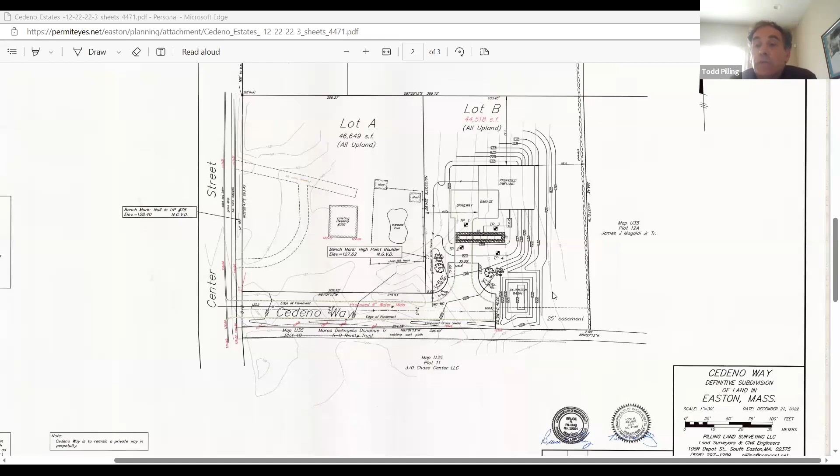I'd rather leave it at the hammerhead. It's a lot less asphalt, much simpler for one house. If this was more than one house, it would be a different discussion, but this is effectively a driveway to this house. Right, and in looking at it and doing some measurements, it was clear that a fire truck could pull in and back out of that.

So again, I think the board should discuss the question of the easement. I'm sorry, the frontage on the property.

Todd mentioned that they do have an environmental impact report that they will provide. He talked about the stormwater, which was my conclusion - it's very clear that's how they're directing stormwater from the site to that basin and through the swale. So those are my only comments.

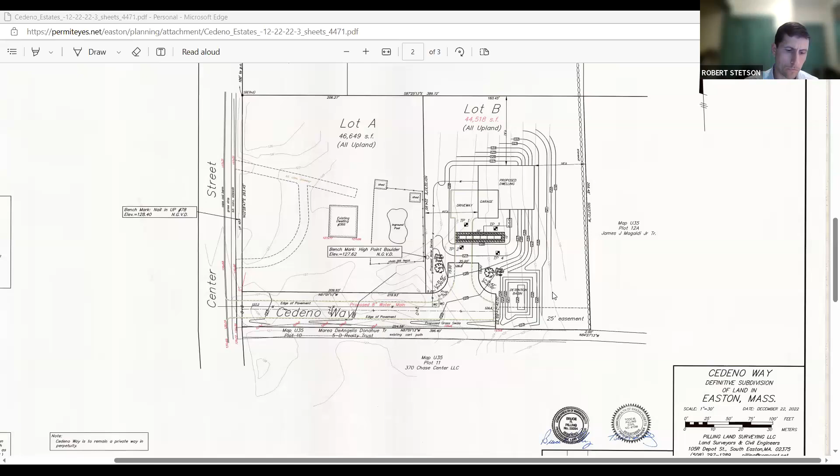What is the actual street address of the existing home? 366 Center. Okay, thank you.

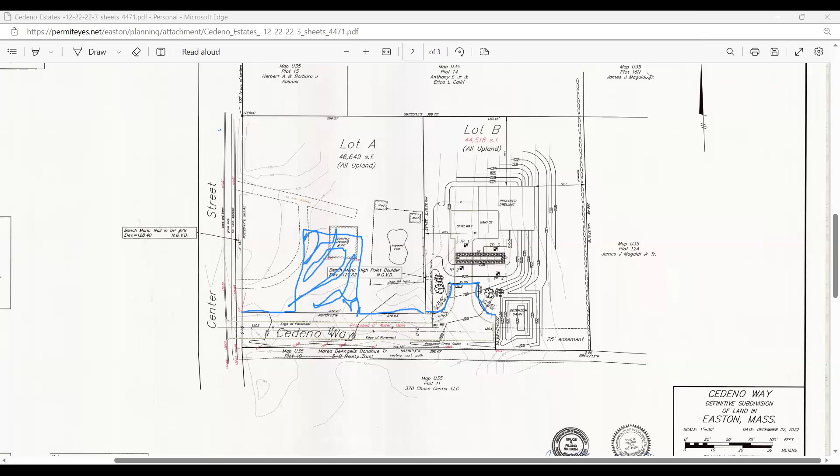What would be the drawback to just having a cul-de-sac? Mr. Pilling, I have a question: if you are going to do something else, what happens with the infiltration basin you have there? Well, like I say, what I would probably do is make a circle, because the 30-foot radius is only 60 feet, so it's actually smaller than what you see here. It would fit right here, smaller than what you're seeing. I would leave the pavement and the drainage basin right where they are, so none of that would change. You would just have a different circle property line.

Is the hammerhead your preference? Well, it's my preference because I don't see the need for this otherwise. This is cleaner for the fire department and vehicles turning around, they're turning around in the way as opposed to on private property. I understand it's a private way, but I'd rather keep street traffic to the street and driveway traffic to the driveway.

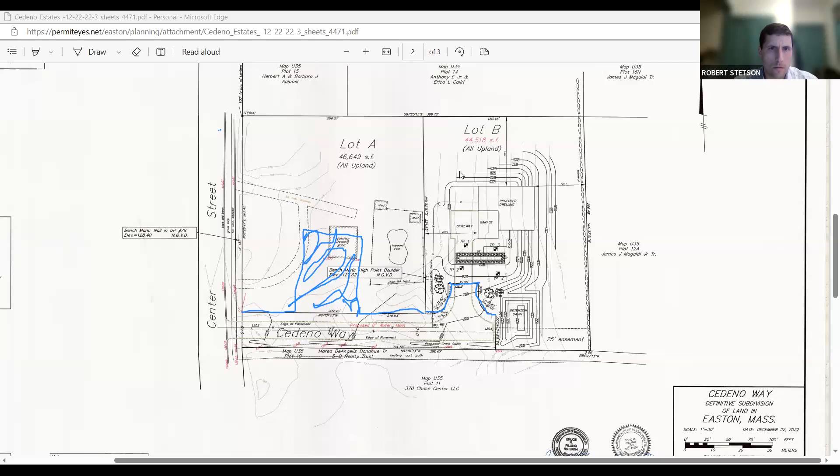Do we have that in writing from the fire department? I don't think they weighed in on this yet. Okay, well, maybe that's something we need to do. I'd be interested to hear what the fire department has to say about this as well. I'm just checking because you had no adverse comments, and I think the fire department did weigh in and approve it, probably based on the hammerhead. Let me just look this up.

While she's looking, I'll answer the question in the chat. Somebody asked if that existing home at number 366 is going to be demolished and a new home built, or if we're just going to leave the house. The answer is that we're going to keep that house, the pool, and the driveway. It's all staying. This is just a property line to create the second lot.

Did I buy you enough time? Yes, the fire department did not comment.

So next time, Stephanie, I'd like us to hear their comments before. I can reach out.

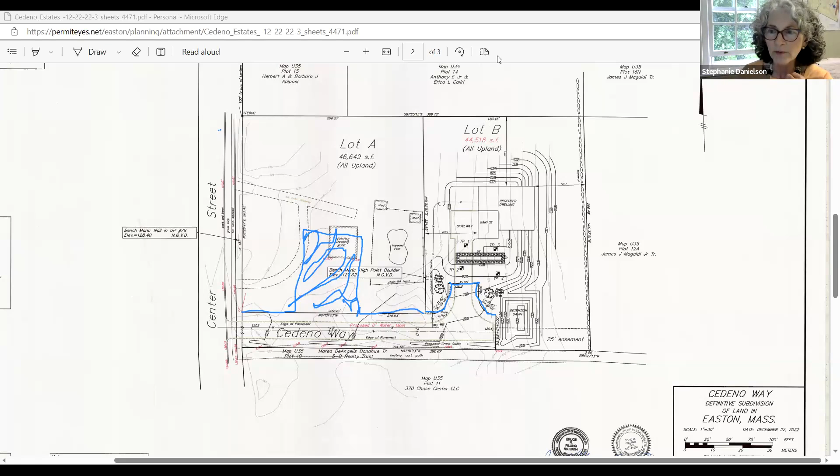I was just gonna say, I recall, and I'm trying to remember if it was Deborah Lee Lane, which project it was, where they did a similar thing. The road layout had the cul-de-sac, but rather than extending the road from the existing cul-de-sac, they were building two adjacent lots that were undeveloped. They wanted to extend the road but needed frontage, so they retained the layout of the cul-de-sac and just extended the road, so you didn't have to, as Todd pointed out, just throw a bunch of asphalt down to satisfy the frontage requirement.

And Todd, where the road is going to, or where the access for lot B is going to be, there would be some tree clearing adjacent to the existing house that's remaining. Is that right? Yes.

That full width of the roadway would get cleared, so we can put the grass swale on the south side, the underground utilities on the north side, plus the 20 feet of asphalt.

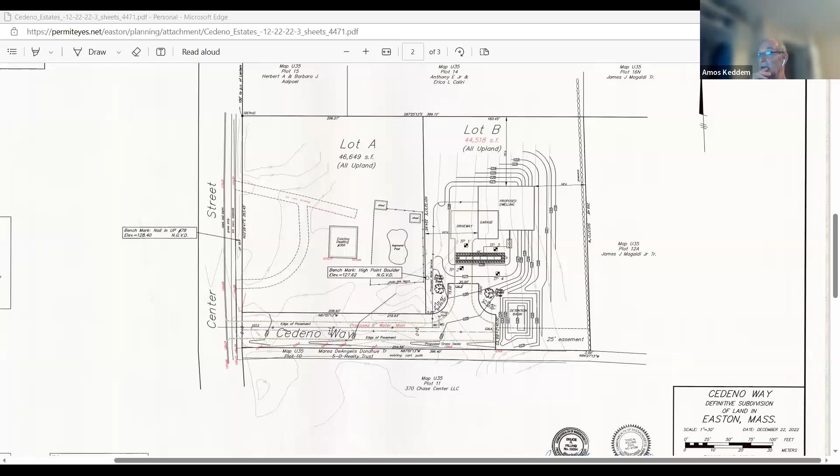Mr. Pilling, I look at the picture from the street view, and I see power lines going there. Is a facility of power going to that entrance today? Let's see. Yeah, right there, hold on, I think it shows up from the street better. It shows the power line there. So the underground utilities are going to come into probably some kind of transformer because it's over 300 feet to the house, and then the electricity will come in off of that.

Stephanie, looking at these waivers, what is the reference to 501-26, the waiver for the 42-foot bounds? So the bounds are, that is the depth, right? 42 inches, yes. Excuse me, I'm sorry, I said feet. Yeah, I'm not setting a 42-foot bound.

The board has heard this before, and I can't remember what project it was, but what the board had been told is that the requirement of the town is a 42-inch bound, so a 42-inch in depth bound. These are the stone markers, concrete, that mark the boundaries of the property. Yes, and what we've been told is that the local manufacturer's standard is 36 inches, and that it's quite a bit more for the 42 inches.

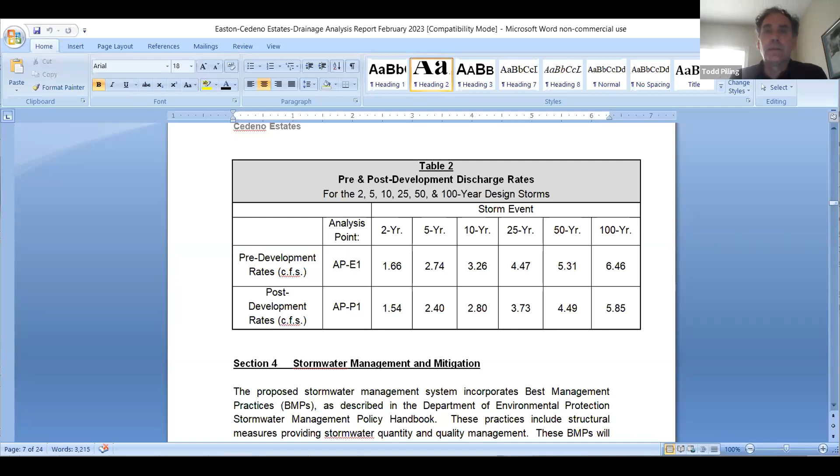But we're doing our best to reduce things out there. Obviously, we're going to add in the tree line to try and make it better. I'm not sure if I'm explaining it well enough for you to understand. Obviously we can spend a lot more time on drainage, but I'm not trying to bore anybody either.

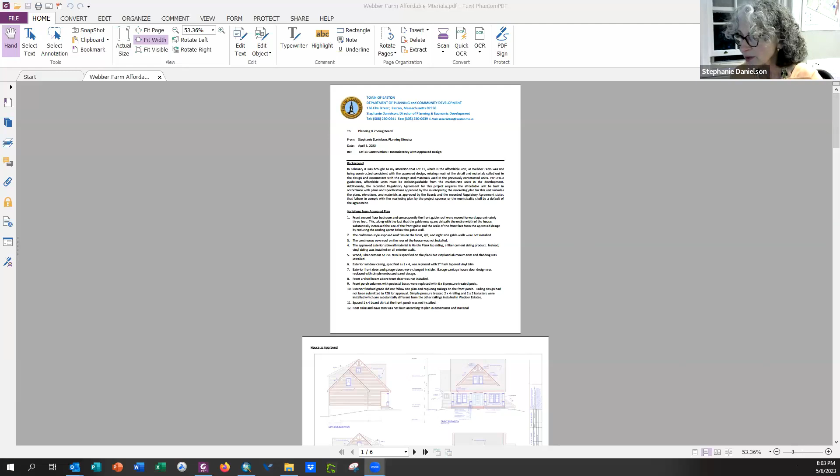One of the things the board can do is issue fines as part of the violation. You could indicate that if they don't come into compliance and meet the goals or changes that the board wants to see, or the correction the board wants to see, you can start issuing fines, and it can be retroactive to when the first violation occurred. So you have the ability to assess a $300 fine for a violation, and every day the violation remains in effect, it's an additional $300. I think frequently that's used as a tool to get to the correction — really what you want to see is a correction.

So in the documents that I shared with you... when you say what the board wants to see, isn't that clear? We want to see what was on the plan that was approved. What else do we need to do? Do it according to the plan we approved, or else, whatever that is.

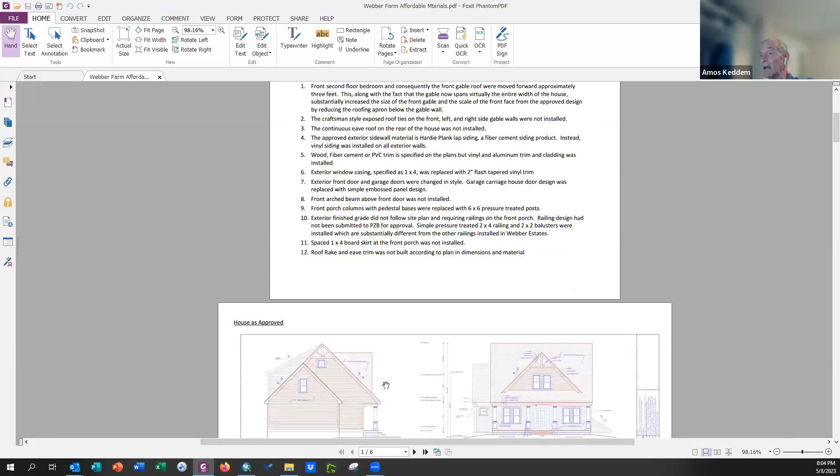What do I need to do? We need to go make lists again and work very hard. They are in violation, they didn't comply. There is a plan, it's very detailed — you even detail one by one all the things that don't match. What else can you do? That's it, we need to hear from them. But I don't know what enforcement tool we have.

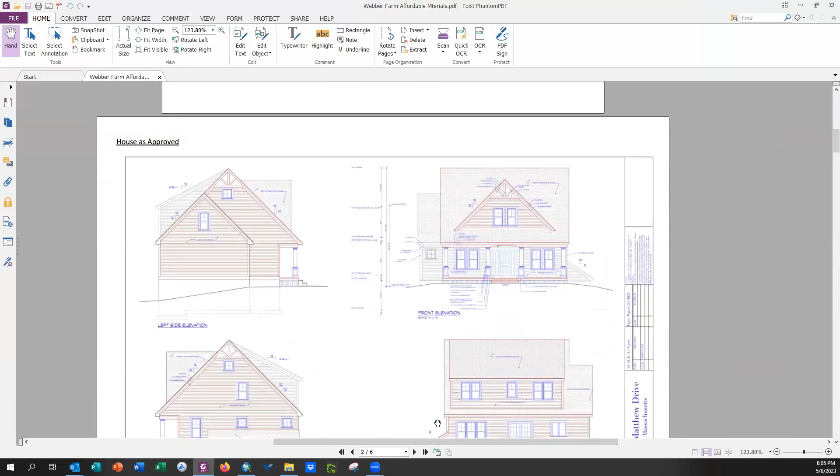I would think that the enforcement tool, given that the building inspector is the zoning enforcement officer, would be to make the zoning enforcement officer aware that there is a violation. The building inspector is within his right to do a cease and desist, and also not grant any other inspections or occupancy permits, which would halt the project from moving forward. That's what I would think would be in our power.

Right, Deb, and in fact that is what the board would be asking — the board would be asking the zoning enforcement officer to issue the violation because it's a zoning violation. It would come through the zoning enforcement officer. And that's what the discussion is: what does the board feel the violation is? I think it's pretty clear. And then what corrective actions does the board want to see?

I think that typically when there is a violation and plans are not built as specified, the request is that the plans be built as specified. So anything other than that would be a violation. And whether there's a vehicle for the applicant to petition the board for some relief, I don't know if that's something that's even specified in any formal way, but if you don't build it as planned, you generally need to redo it.

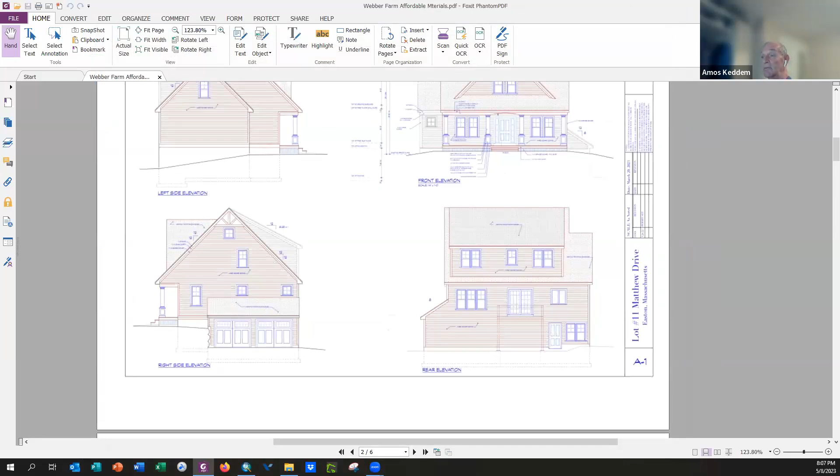You come back to us and tell us what. Well, I think that's right. To Deb's point, I suppose if this is before the occupancy permit, as long as the zoning enforcement officer is aware of it, the owner is going to have significant motivation to come back to us and either fix the problem or request some kind of reprieve as to some of the conditions. But at this point, we don't need to go there because we've asked this person to come see us at least on 2 occasions, and he hasn't done so.

So I think I agree with both of you, and I don't think we have to discuss it any further. I'll entertain a motion. The motion is to inform the building inspector of the violation and request a halt of the occupancy or other permits until the issue is discussed and resolved. I think it would be a motion to...

...forward this matter to the zoning enforcement officer to issue a notice of violation, identifying the conditions that Stephanie has identified in her memo to us on Sunday night. Does that sound right? Yeah. And we don't need to vote on that. Yes, okay.

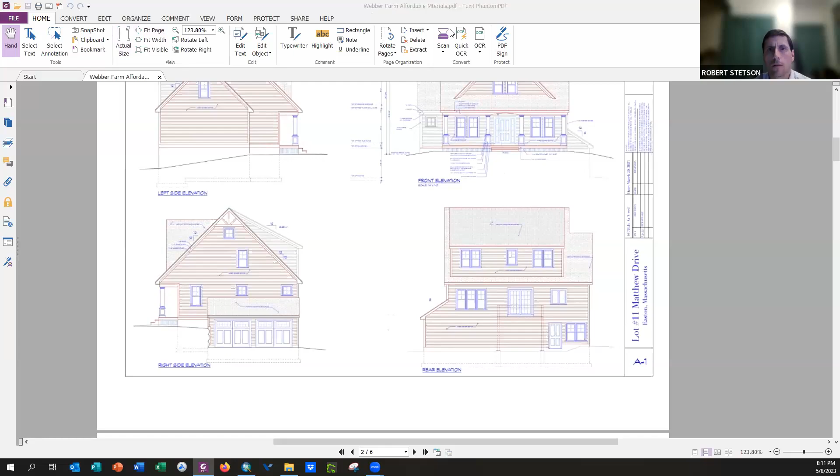All right, next up, the last item is meeting minutes. They are good to me. How about a motion to approve the minutes? I'll second it. Any further discussion? Hearing none. Keddem, aye. Balsaric, aye. And Stetson is aye as well. Motion passes.